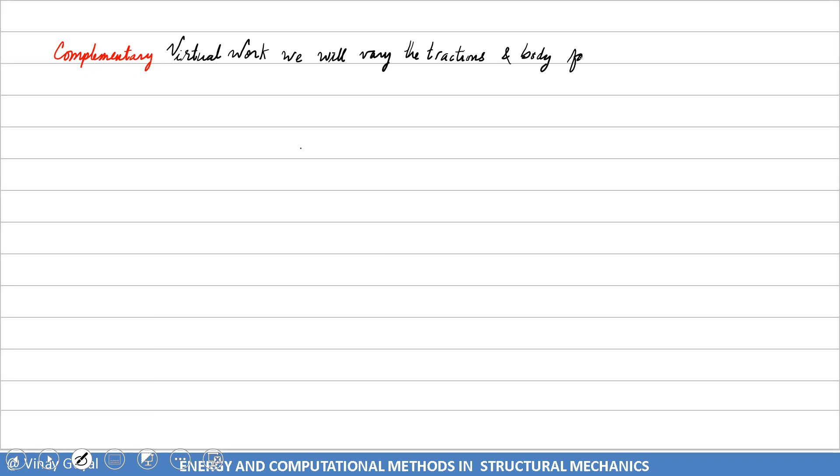So in the complementary virtual work, we will vary the tractions and body forces and keep displacements fixed.

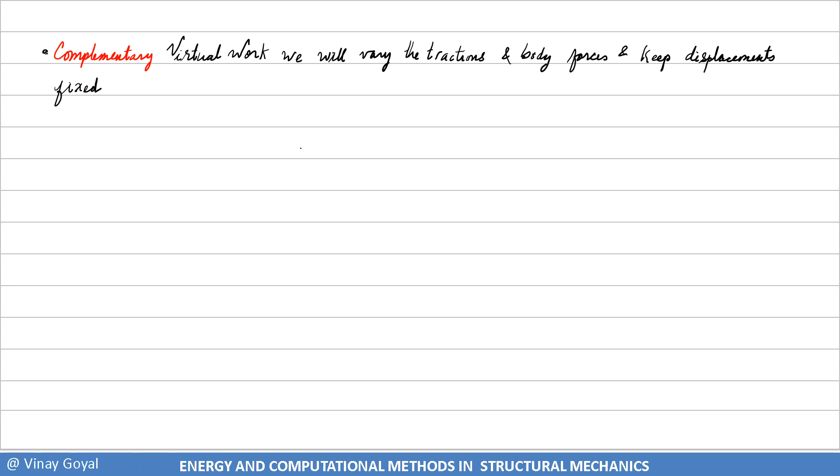In this situation, we will demonstrate that external complementary virtual external work is equal to the complementary internal virtual work, and we will demonstrate that this is correct, that this is going to occur.

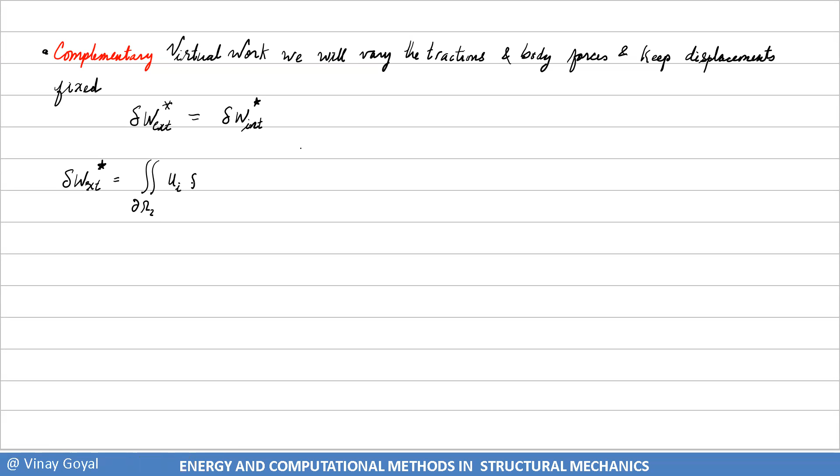So let's start with external virtual work, the complementary version, double integral, and we'll vary tractions now. We've been varying deflections all along; we'll be varying tractions instead, because we can.

We will show now that we can substitute Cauchy's relationship, which states that Ti of n equals sigma ij nj. So I get this.

And now I'll use Gauss theorem to convert the surface integral to a volume integral. That simply becomes ui sigma ij comma j d volume.

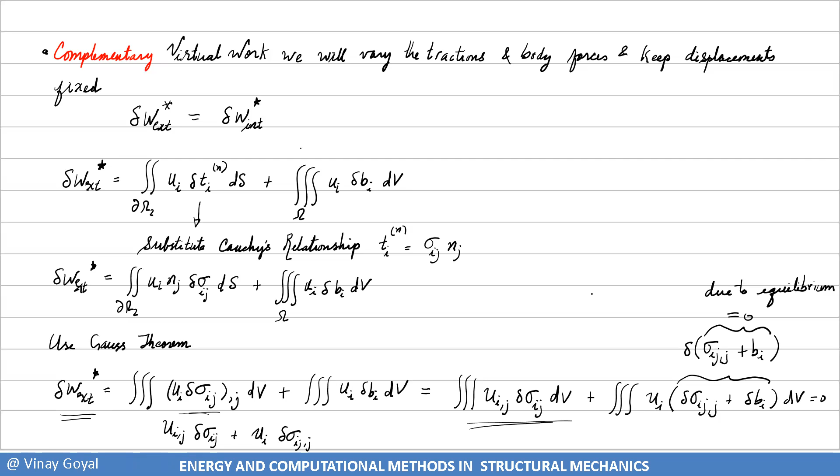So now I'm left that external virtual work, complementary version, is equal to this expression. But we know how to deal with that. We know that ui comma j del sigma ij can also be written as epsilon ij plus omega ij del sigma ij.

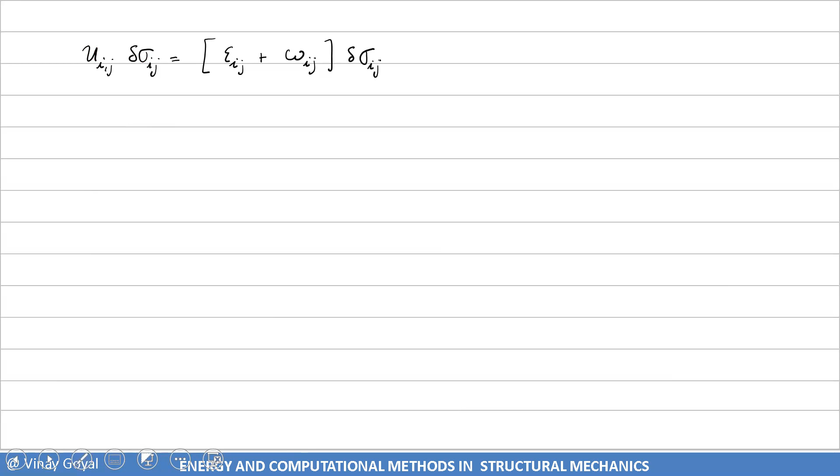We already know that this is a strain, infinitesimal strain, and this is a rotation tensor. What's going to happen here is that this term does not do virtual work, because this is a skew symmetric tensor and that's a symmetric tensor, and the multiplication of a symmetric tensor times a skew symmetric tensor gives you zero.

We've already demonstrated that. So therefore, what I really have is the external virtual work is equal to the internal virtual work, and I just demonstrated to you that's the triple integral over volume of epsilon ij del sigma ij dv. So I've demonstrated that, and we've arrived at that conclusion.

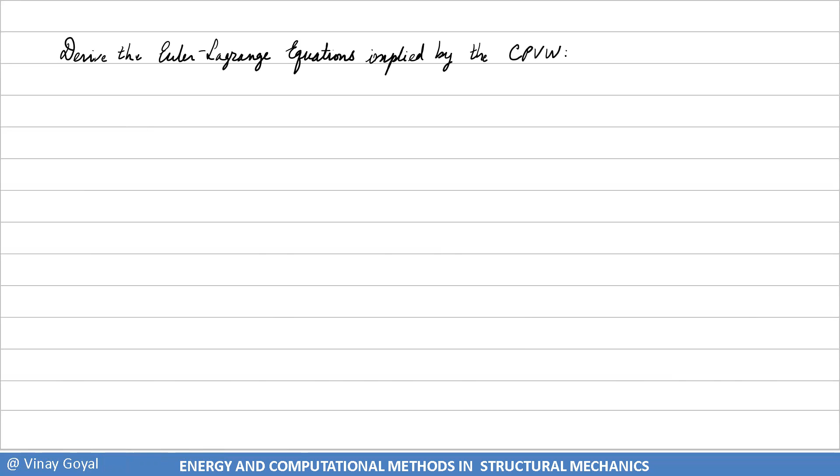So now what I want to do is derive the Euler-Lagrange equations implied by the complementary principle of virtual work. To do that, I'll start with the fact that I already know that the complementary internal virtual work equals the complementary external virtual work.

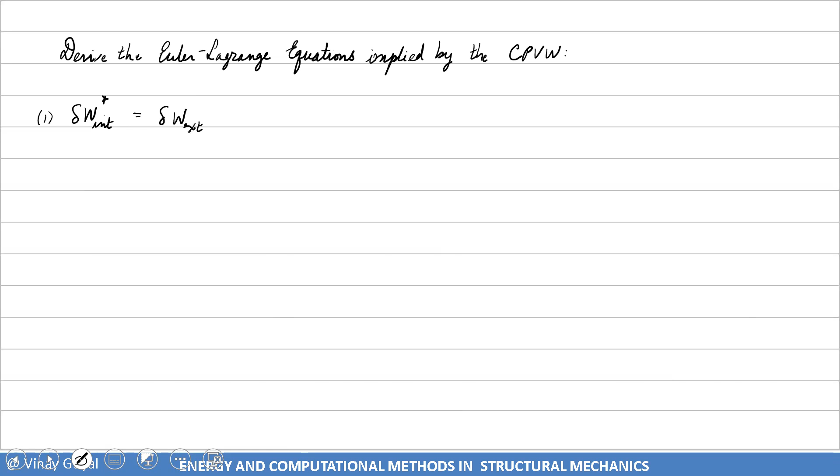I will write everything on one side of the equation, so I'll do this minus equals zero, and I'll start over: integral over volume of epsilon ij del sigma ij dv minus volume of ui del bi dv, minus, on surface 1, ui — and I could be specifying a deflection, so let's make it ui bar — del ti ds equals 0.

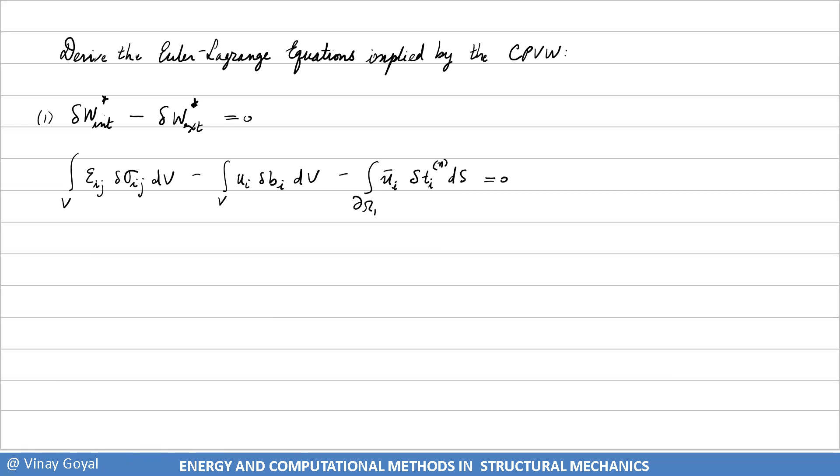So what I'll do now — and bi is the body forces, let me remind you, ti are the tractions, ui are the deflections.

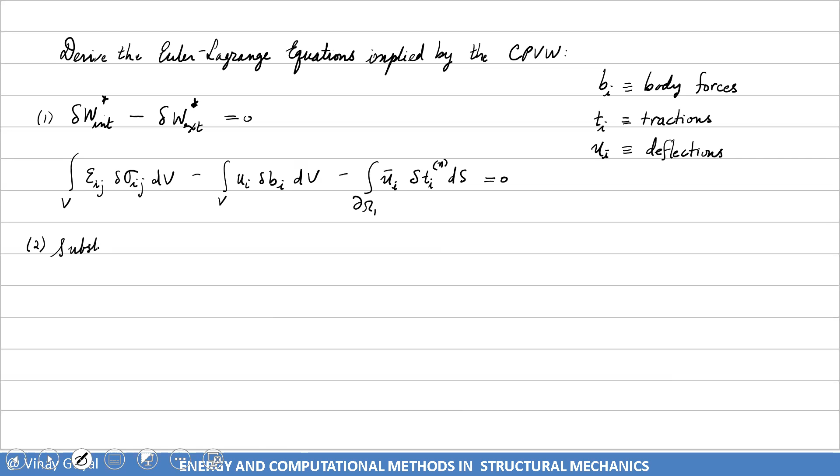So we know how to approach it. We'll substitute the fact that bi is equal to minus sigma ij comma j from equilibrium. We know that. And in addition, we know from Cauchy's relationship that Ti is equal to sigma ij nj. We know that.

So we get the following expression, and the sign became positive, and I have minus like this. Again, I'm substituting Cauchy's relationship here, and I'm getting closer.

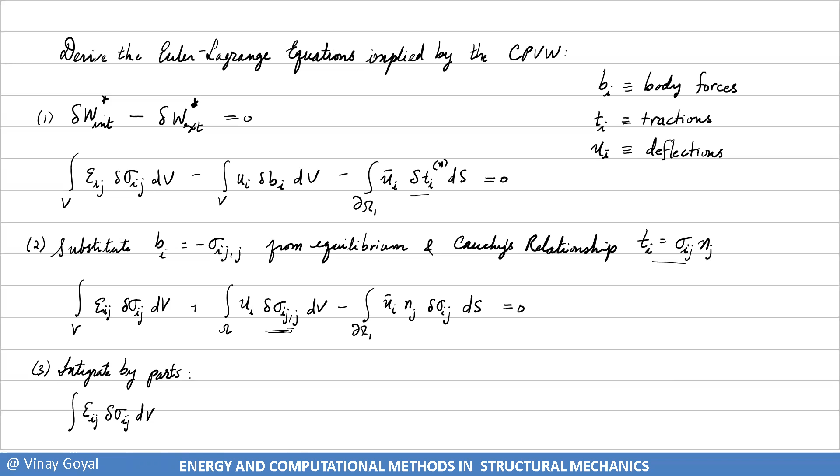So now let's integrate by parts to remove this comma j, and to convert this into a surface integral. So if we integrate by parts, we get the following — integrating by parts this term here. So let's do it here. So I get the minus, and that goes inside the volume. Perfect.

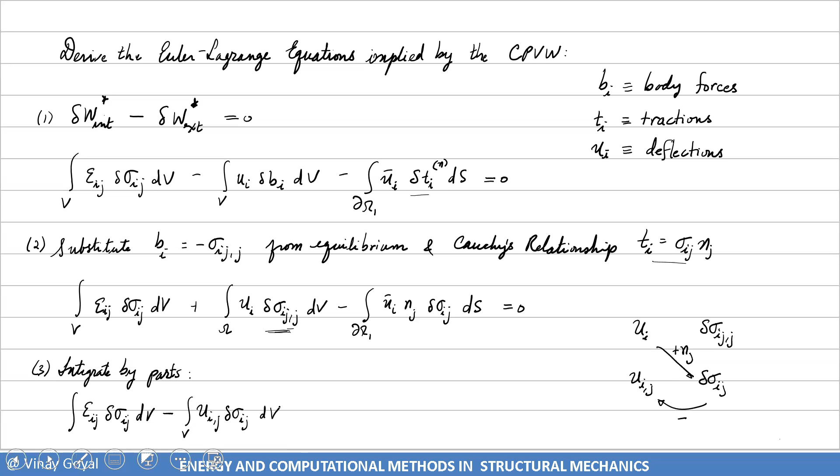And now I have plus the integral over omega 1, ui nj del sigma ij, plus integral over omega 2, ui nj sigma ij, like that — and I forgot the surface ds there — minus ui bar nj del sigma ij ds equals 0. I apologize, everything got cramped in there for a second, so let me move this arrow so everything's cleaner.

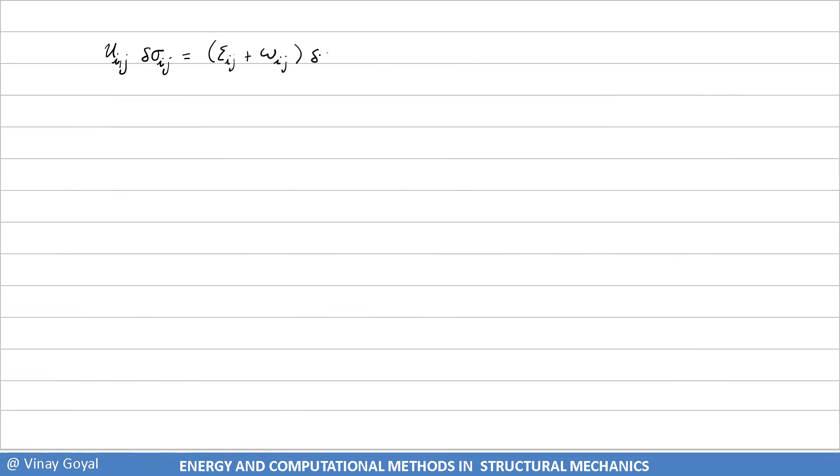I want to focus on this term a little bit more moving forward. We've already taught that ui comma j del sigma ij is equal to epsilon ij plus omega ij del sigma ij, and that gives epsilon ij del sigma ij plus omega ij del sigma ij, and the rotation tensor times the symmetric tensor gives you 0. So because this is skew-symmetric and this is symmetric, I get epsilon ij.

I apologize, let me move here. And epsilon ij is 1/2 of ui comma j plus uj comma i, times del sigma ij. So this is equal to that. We know that, so I'll substitute that here, into this expression.

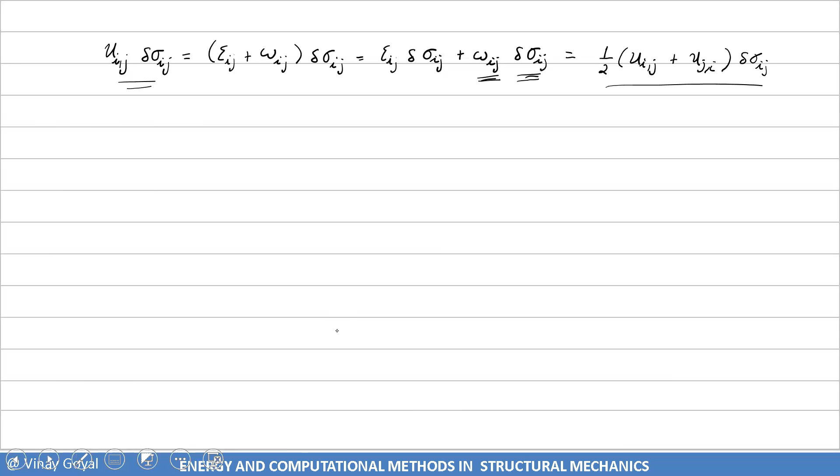I'll substitute it into this expression here, and I get the integral of epsilon ij del sigma ij dv. And then I also get minus 1/2 ui comma j — I apologize, it's a glitch.

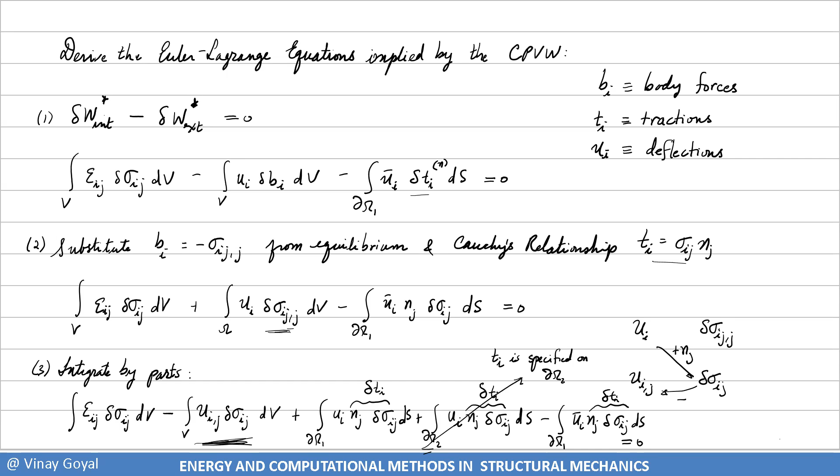And then I have all these other terms that need to be looked at. Now, you can see here, this right here is del ti, and this right here is del ti, and this right here is del ti. If I specify tractions on this partial omega 2 boundary, this goes to 0 if Ti is specified on omega 2. And you can see how now things are starting to simplify.

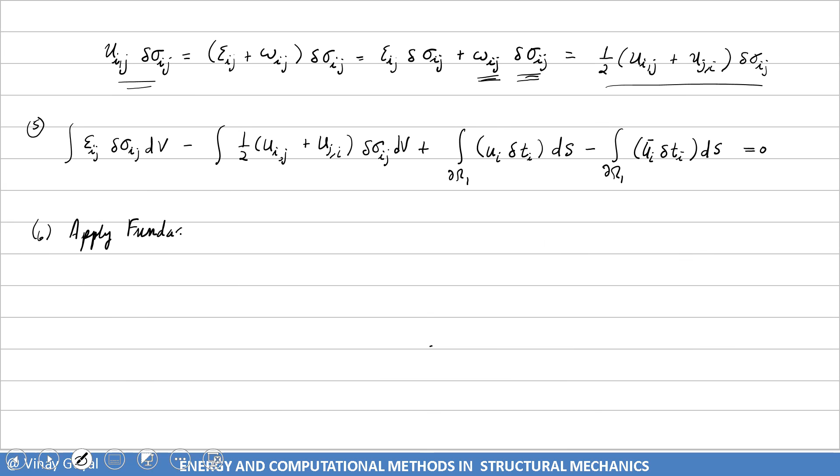And now I can apply the fundamental lemma of calculus of variations. And for any del sigma ij, then I have that epsilon ij must be equal to 1/2 of ui comma j plus uj comma i. That's the Euler-Lagrange equation in V.

Secondly, I have that you also have that this is equal to that on the boundary, and then that comes out automatically: Ui equals Ui bar on the boundary. We also specified tractions on the boundary. In other words, the complementary principle virtual work, the Euler-Lagrange equations turn out to be the kinematic relationships.

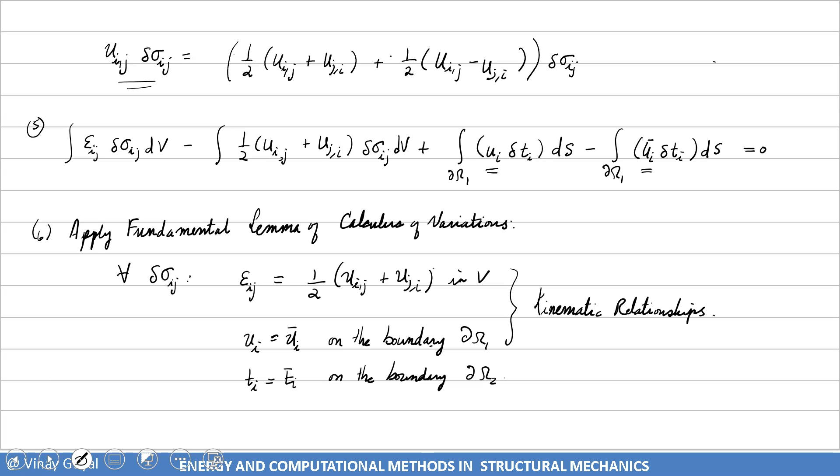And I know this is omega ij, and omega ij times this is 0, so I will have gotten this. And that way I'm not using the strain deflection relationship because it looks like I did. So when I got to this step and this step, this came out automatically. I didn't force it, it just came out automatically. So it's impressive how I derived the kinematic relationships of strain to deflections without even using it, and that is quite powerful here.

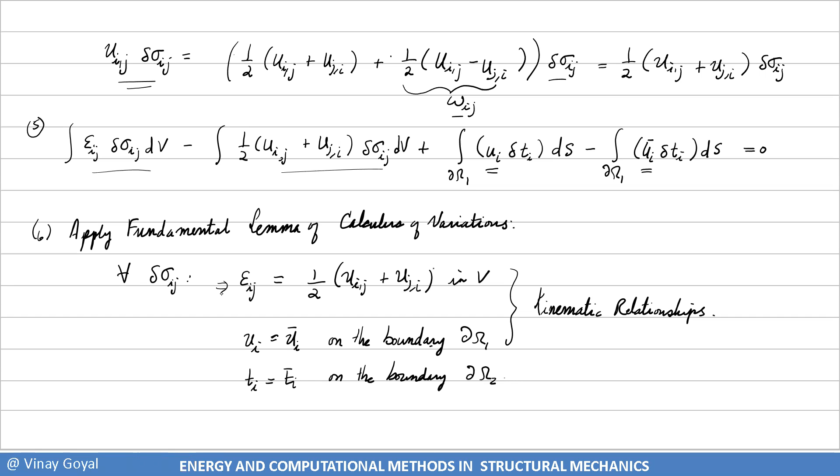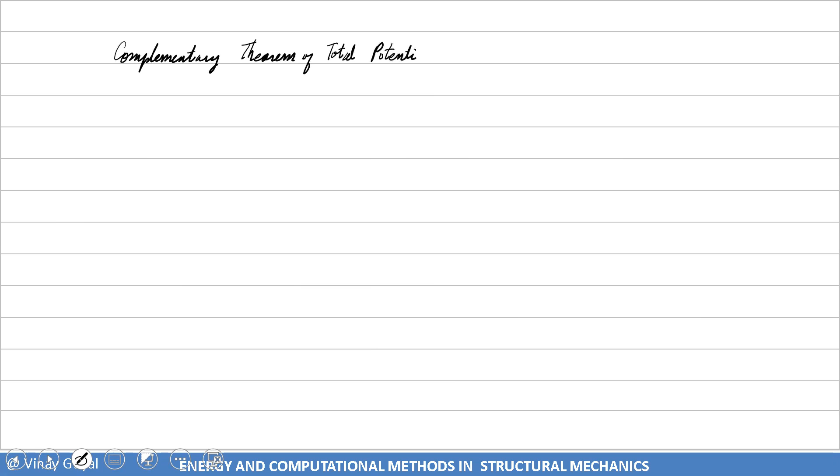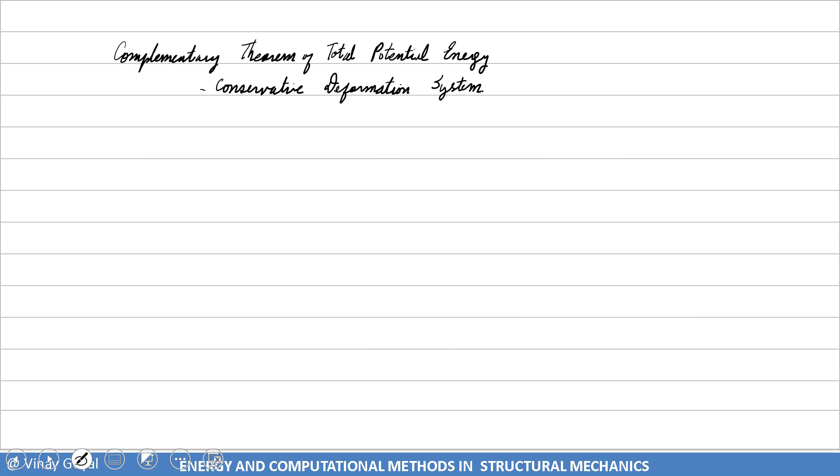Using similar arguments I discussed in the previous lecture about the theorem of total potential energy, I can also derive the complementary theorem of total potential energy. It applies for conservative deformation systems, for elastic material, and for conservative forces.

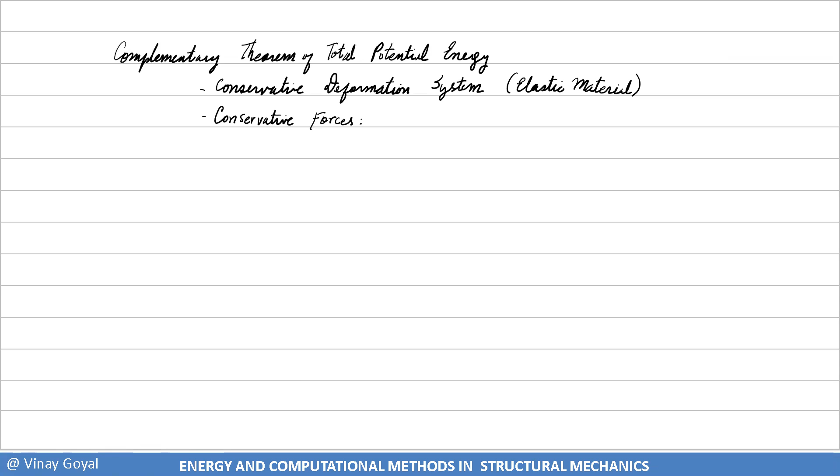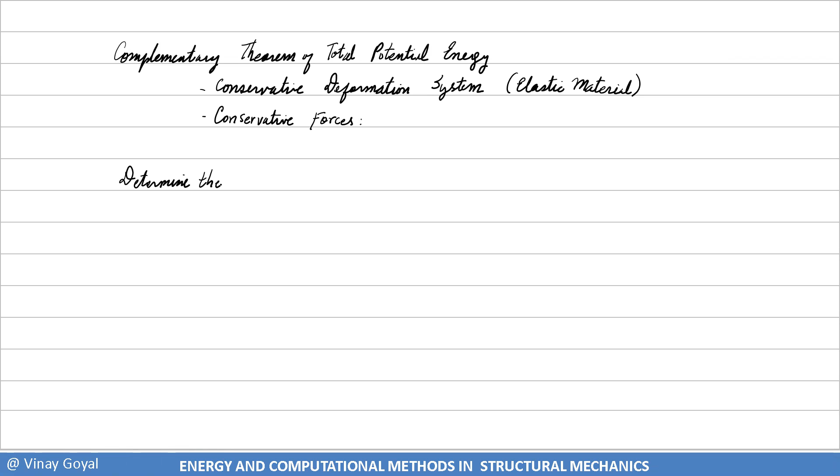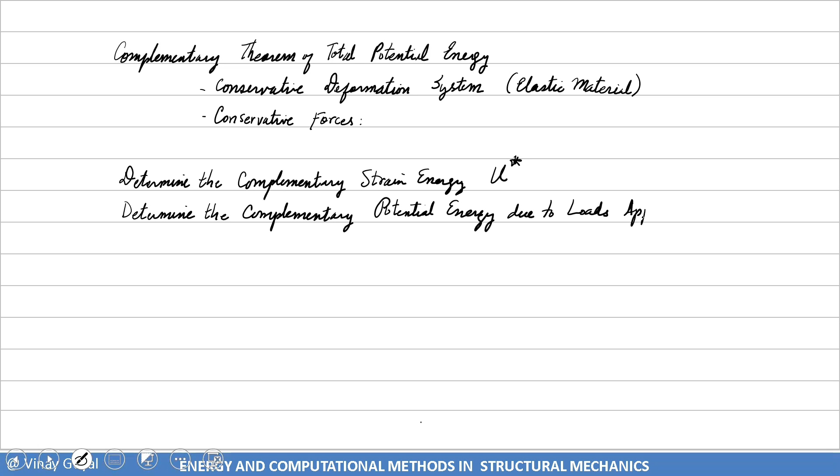And so if that is the case, then we can say that if I calculate, determine the complementary strain energy U star, and we want to determine the complementary potential energy due to loads applied, then what I'll get is that the first variation of pi star is equal to 0.

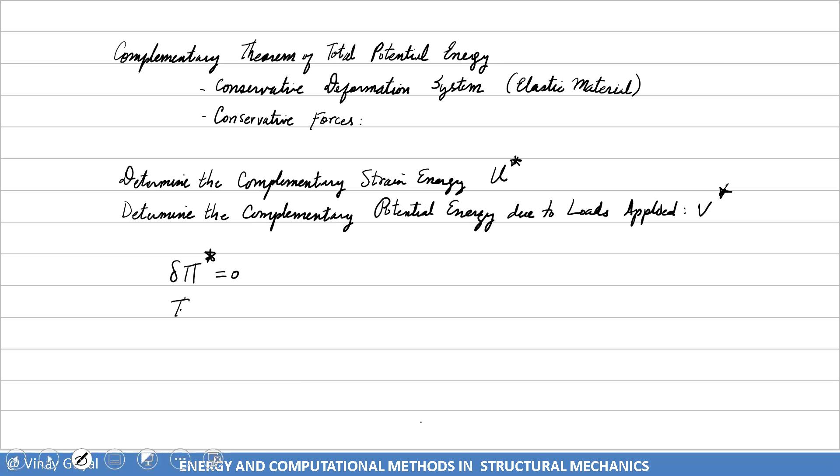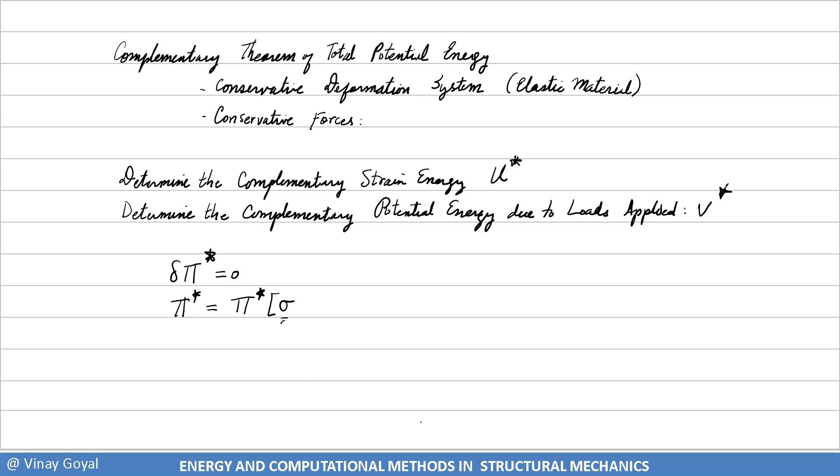And here, pi star is going to be, where pi star is a function of stress now. So these are my functionals now, and it's going to be equal to U star plus V star. And the strain energy density, small U star, for linear elastic material is going to be 1/2 Sijkl sigma ij sigma kl. Now you want pi to be in terms of stress.

And Sijkl is the inverse of this one. So that's how you approach the problem. Here, V star is really the minus of Ti Ui ds, just like before, minus the integral over the volume of Bi Ui dV. So that does not change. The only thing that's changing now is that pi has to be written in terms of sigma ij, and U star is 1/2 of that for linear elastic material.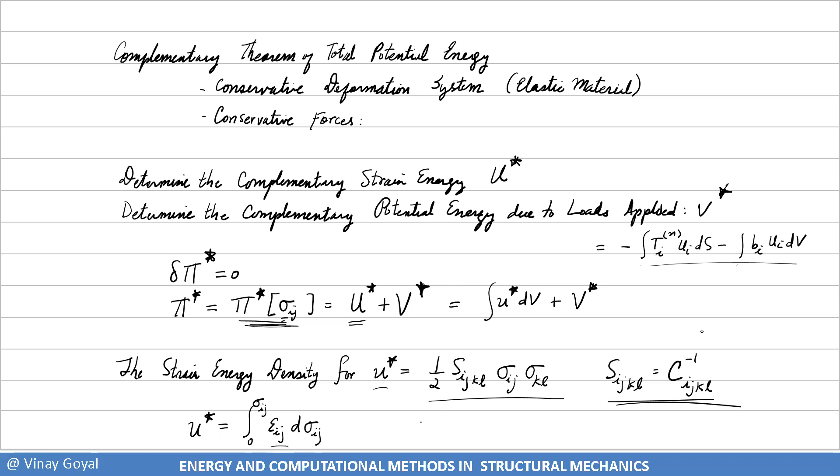And then I specialized the virtual work principle for the complementary version for conservative deformation processes, conservative forces, and demonstrated that now this relationship also holds. And so what the theorem is really saying, to go to the theorem now in this case, is telling us, and that's the theorem of total complementary energy.

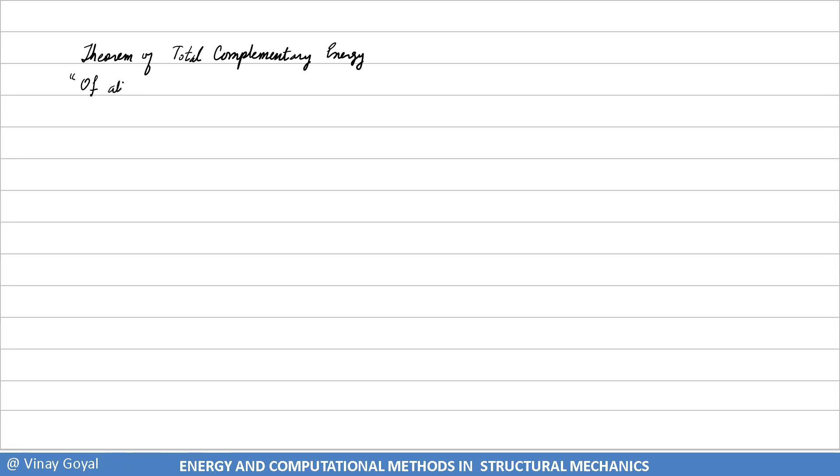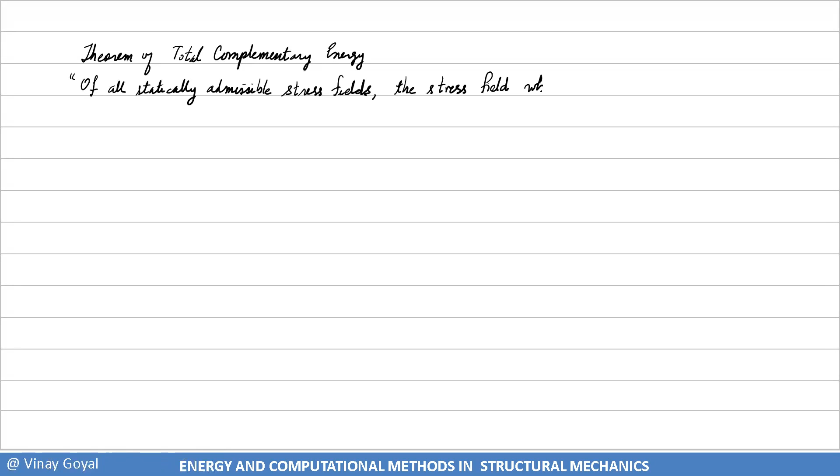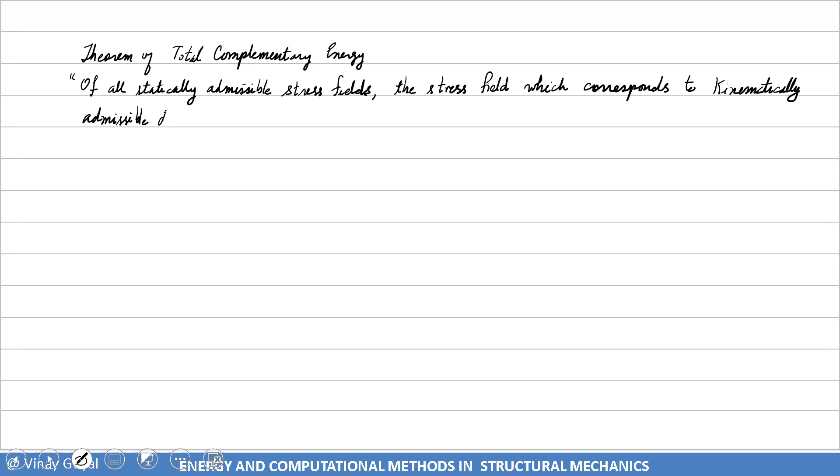What the theorem is saying now is: of all statically admissible stress fields, the stress field which corresponds to kinematically admissible displacements makes the total complementary energy stationary. So we've shown that that is the case, and this is what we mean with stationarity.

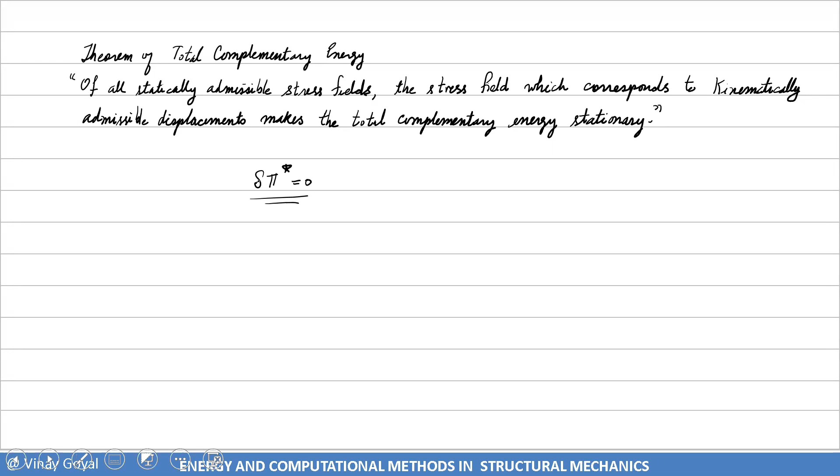And that's the complementary version of the theorem of total potential energy. So with this, we conclude this lecture, and we'll pick it up in the next lecture.